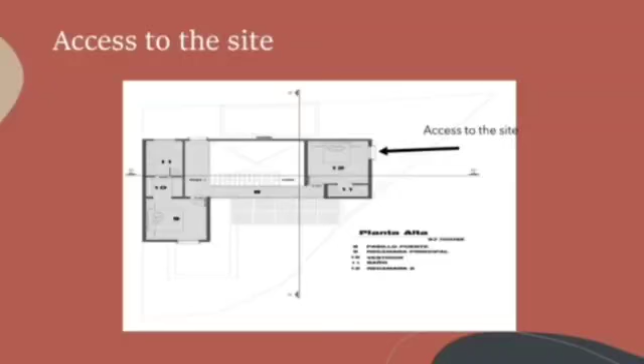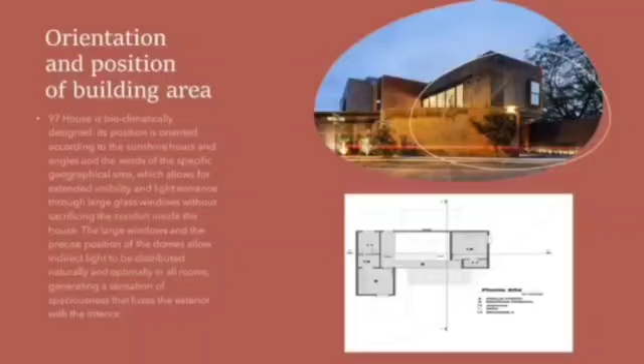The access to the site is given next to the main gate that is directly accessible from the main road. The orientation and position of the building is designed so that maximum sunshine and wind is allowed throughout the house. The house has large windows, allowing direct light throughout the house and rooms, giving a pleasant feel inside.

As for the topography, it is situated on a plain site, and the parking facility is given directly next to the main gate, which is directly accessed from the main road.

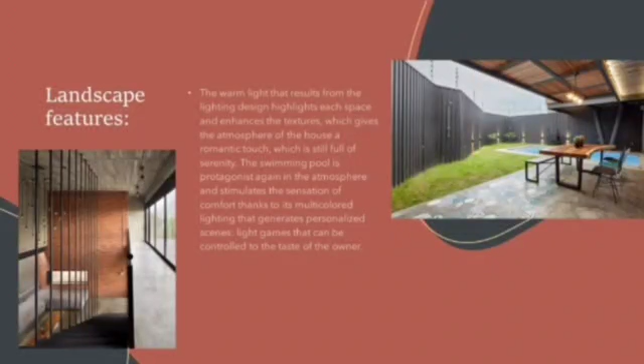As far as the landscape features, the main highlight is that it gives maximum sunlight and it is an area with large wind flow. These features are used by giving an outdoor swimming pool and an outdoor garden.

As far as the surrounding context, it is situated in a neighborhood with nearby houses and locals. Thus, it is prone to large noises from the surrounding houses and the main road.

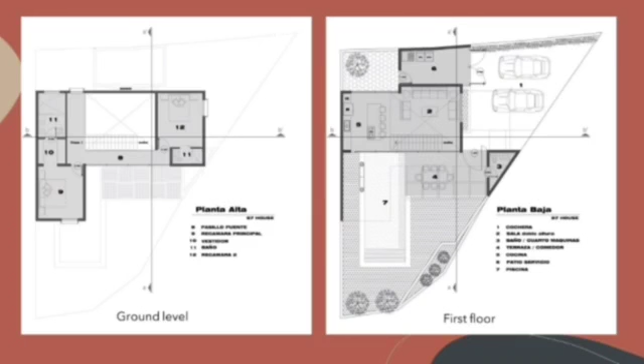As far as the horizontal and vertical zoning of spaces is concerned, this house consists of two floors, ground floor and first floor. The ground floor consists of public space, semi-public space and semi-private space.

The public space is the porch and the parking facility provided for the house. The semi-public space is the living room, the dining area, and the entrance from the porch, which enables guests to come and accommodate these spaces.

The semi-private spaces are the kitchen, the swimming pool situated in the backyard, and a washroom next to the dining room.

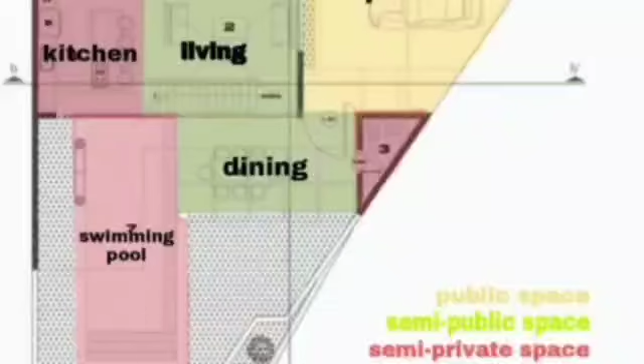As far as the first floor is concerned, it consists of two bedrooms and a corridor. The two bedrooms with attached bathrooms are considered private space, and the corridor is considered semi-private space.

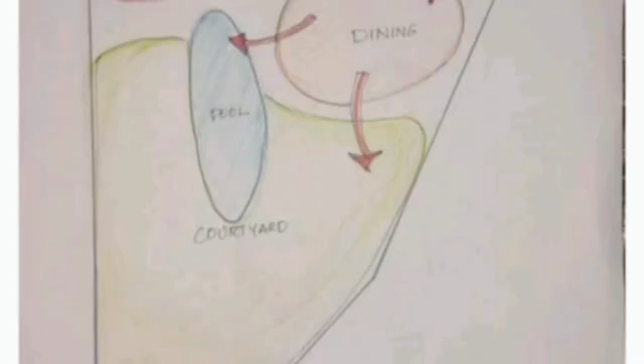Floor plan study: in the ground floor, there's a dining room, a living room, a kitchen, a toilet, and a courtyard, and a place called Genkan in front of the porch where you remove shoes and hoodies. On the first floor, there's two bedrooms, two bathrooms, one dressing room, and one corridor.

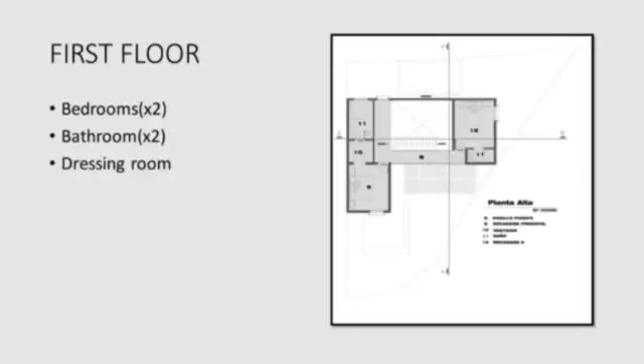As far as the design philosophy, as I mentioned earlier, per the client's request, it is designed with an industrial concept that enhances the shapes and finishes throughout the residence, and it is also bioclimatically designed. Therefore, it gets most of the sunlight and wind in a specified geographical area.

Structural and constructional techniques: to match the industrial design concept of this house, it is mainly constructed in concrete, which gives the design a coarse feel, and steel is used to reinforce the structure for the cantilever parts of the building. Steel, as you know, carries a lot of load and ensures structural integrity.

As far as the climate factor is concerned, the house is designed to fuse the exterior with the interior, to experience the outside in the interior with the large windows and openings provided. As the climate is tropical, it gives a warm feeling to the house.

The form of the building is constituted in a triangular plot with rectangular boxes. The house has a rectangular box structure with a flat roof and has cantilever parts supported by steel reinforcement. Thank you.

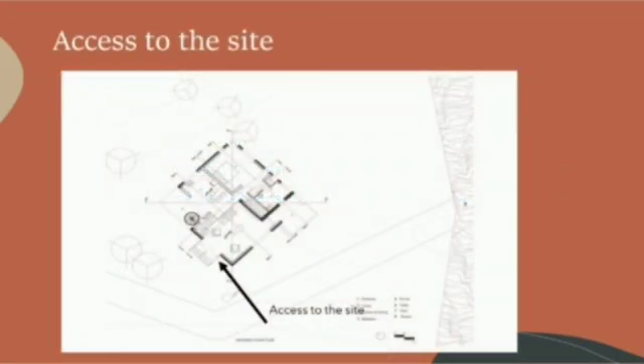The Hornbill House is located at Holland Estate, a tea and coffee plantation, which is in Coonoor, a hill station of Tamil Nadu. The estate is an end-road property bordering forest land and commanding spectacular views. The access to the site is by road and followed by footpaths.

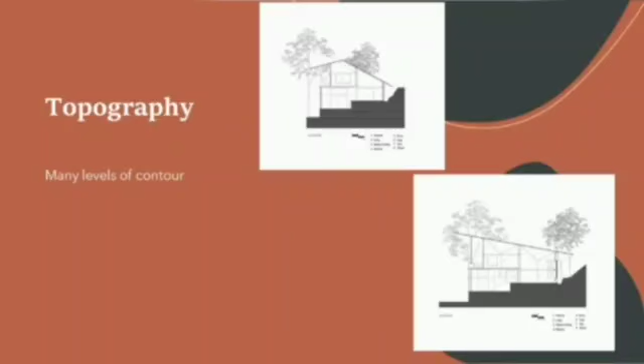Topography. Since it is a tea and coffee plantation site and it is in Coonoor, a hill station, it has topography with many contours, and the building is designed according to the levels.

Landscape features. The Hornbill House is located on an old drying yard sitting on the edge of a waterfall. The house opens onto the views of this waterfall, a valley with a backdrop of layers of mountains and different hues of blue sky and greens of the tea garden, thereby integrating each of these views strategically from a different direction from within the house. All the rooms have predominant view of one of these features while having a glimpse of the rest.

The surrounding context. The building is situated in a tea estate surrounded by mountains, and it has a nice view of nearby waterfall, valley and greens of tea garden.

The sustainable aspects. The walls of these buildings are composite, stone on outside and mud bricks on inside. The exterior stone walls blend with the rock face near to which the building is located and hence rooted to its surroundings, whereas the inner mud walls provide a feel of warmth and shelter.

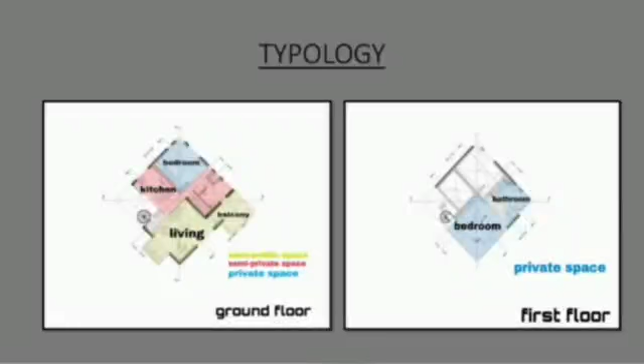The typology of the building. The Hornbill House has 2 floors, a ground floor and first floor. The ground floor can be divided into 3: a semi-public space, a semi-private space and a private space. And the first floor has only private space.

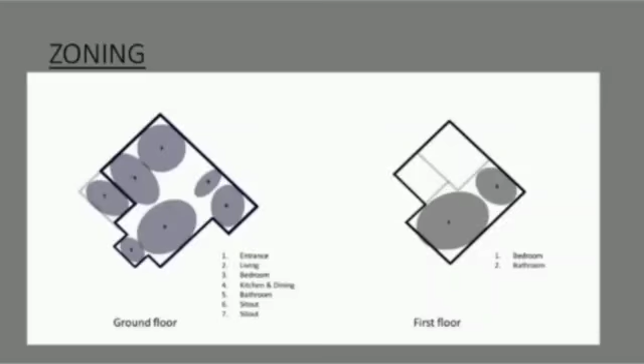Zoning. The horizontal circulation is like entrance to living to 2 sit-outs, and living to kitchen and bedroom. The vertical circulation is only through steps and stairs.

The ground floor of Hornbill House contains a living room, a kitchen and dining, a bedroom and 2 sit-outs. And the first floor contains a bedroom and a bathroom.

The design philosophy or idea. The key idea of this building was to provide privacy to guests, and it was designed for the maximum enjoyment of the views.

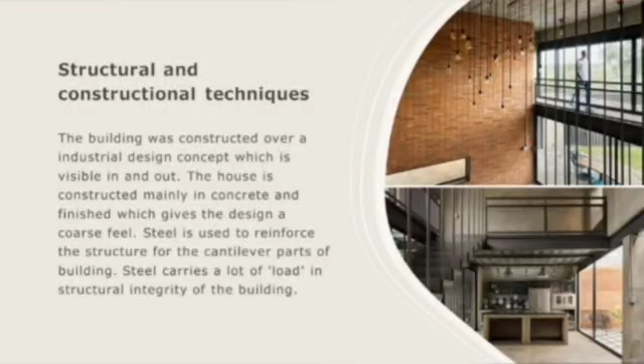Climate. The building is situated in a hilly area of tea plantation, which is in Coonoor, Nilgiris, a district in Tamil Nadu. Hence, the site is in a high altitude area. The climate is very temperate, and to keep the building warm in cold seasons or at night, composite walls are provided.

Form of the building. An arrow-shaped roof gives the structure an aerodynamic appearance and shelters a small terrace in front of the master bedroom. The striking roof of the villa invokes a sense of flight that one feels while gazing at the views.